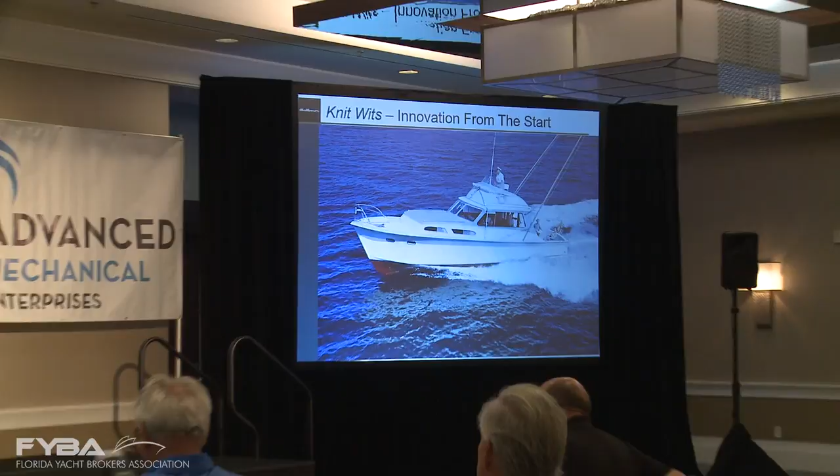Back in 1984, Dave Parker, our president, decided to go after and try to find it for our 25th anniversary. And of course, back then in 1959, 1960, there was no such thing as HIN numbers. So the question came up, how in the world are we going to find it? And so we had a young guy in our organization, some of you probably knew, Curly Cook.

Curly was a 16-year-old kid that Willis Slane hired off of the streets of High Point, North Carolina to work in the plant. And Curly screwed up one day by boring too large of a hole in one of the stud walls. And so Willis Slane got onto him and made him put a patch repair on it. Well, Curly told Dave Parker at the time, if I can get to the boat and it hasn't been modified, I'll be able to tell if it's the real thing.

So, of course, when people found out worldwide that Hatteras was looking for hull 1 and no HIN, everybody had hull 1. Everybody said, I've got it. So Curly would go to these boats. Some of them had been modified, so that was a little dangerous because, you know, you didn't know if it was the boat. He found the boat down in Panama.

A guy by the name of Ted Albrighton owned it, and Curly asked him, can I take that panel down on the starboard side? And the guy said, sure, but why do you want to take the thing down? He took the panel off, and of course, that scab that he put on in 1959 was there. So he called Dave Parker up, and the rest is history. Brought it back to the factory, and she's been refurbished 3 times. So from an innovation standpoint in hull, that's where it all started for Hatteras Yachts.

Now, of course, we've been known, some of you out there know a little bit about Hatteras' past and some of the propulsive technologies that we've utilized over the years. This is an example of some of that technology. Listening to Rich and George and all these guys this morning, I was getting a nervous twitch every once in a while because I've experienced all of that bad stuff that they talked about.

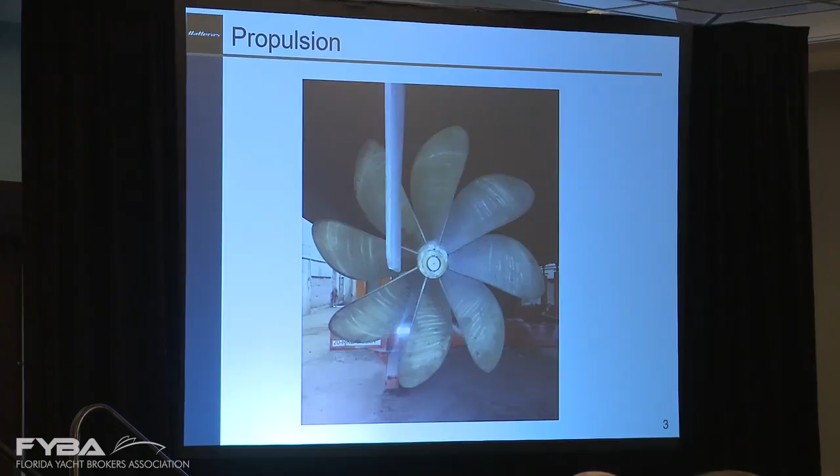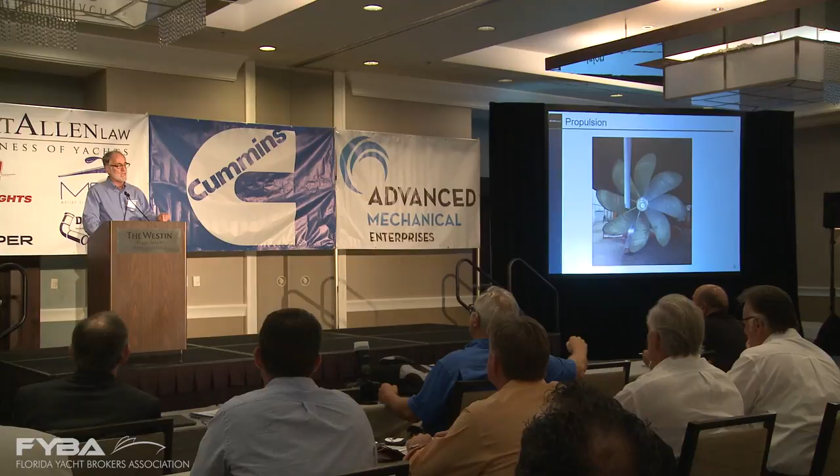But the vibration was a big issue for us because we had an established vibration standard back in the early 70s, but the maximum horsepower was probably 450 horsepower at the time. We still have that same standard today, but those horsepowers are up around 2,600 horsepower. So in order to keep that vibration that Rich talked about at bay, we've had to go to multiple bladed propellers, hybrid propellers, highly skewed blades, you name it. We've had to throw everything in the technological book at these boats to try to minimize and mitigate the vibration and noise issues.

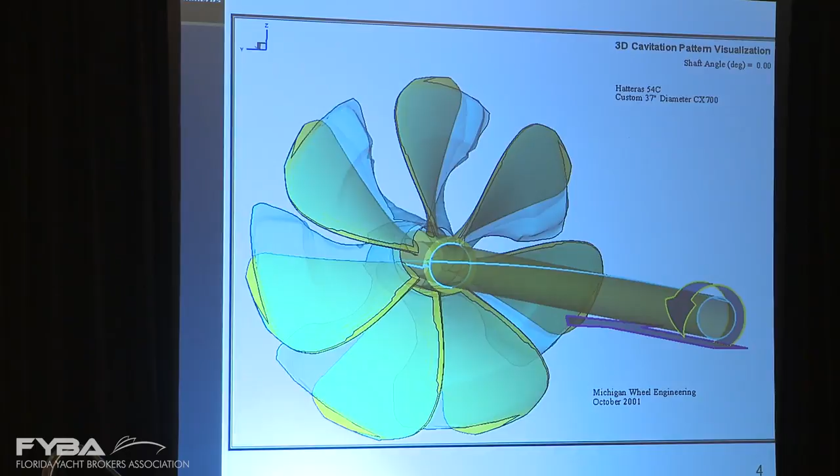This is some of the work that we typically do in getting a propeller developed, whether it's with Rolla, whether it's with Michigan Wheel, or even VEEM's. We let them go through a comprehensive cavitation analysis to try to minimize the cavitation. By minimizing the cavitation, you're able to remove the noise, and also you're able to improve the performance.

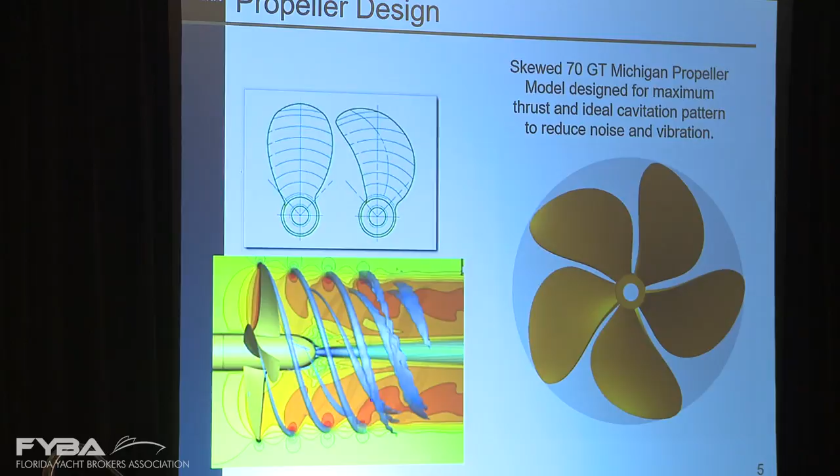Here again is an analysis we've gone through in trying to take a propeller blade and add skew to it, as you can see right here. This actually helps with the vibration that we experience on the boats.

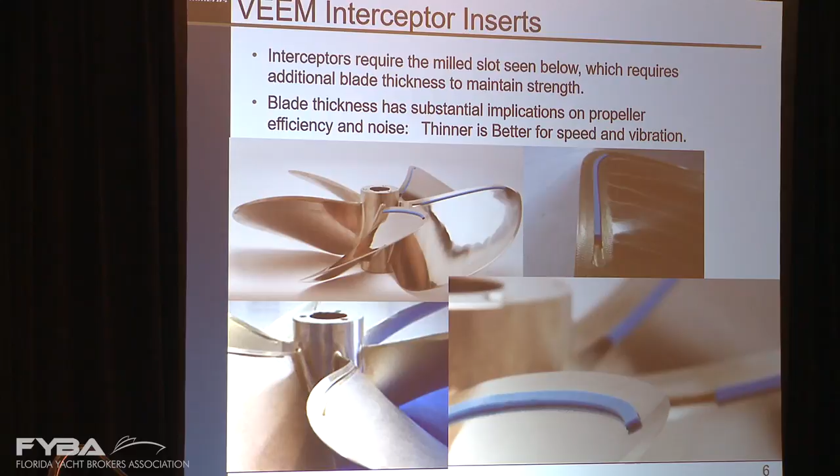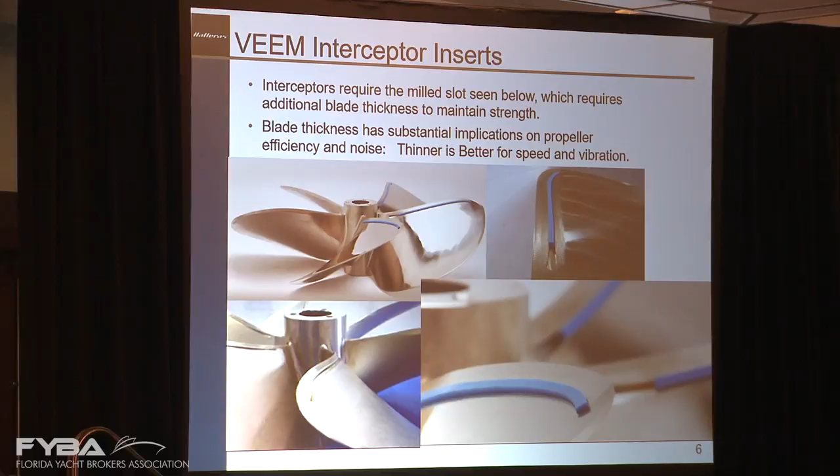How many of you have heard of VEEM propellers and the little plastic strips? What do those little plastic strips do? Well, we use the VEEM propellers from time to time, but what we found is that they're very creative in the method they use to try to balance the loads between engines. Most engine manufacturers are plus or minus 3%, but with all the digital information we give customers today, they will hit us pretty hard wanting to know why one engine's 10 RPM more than the other. This little strip allows us to balance that.

So either we utilize the VEEM propeller with a customer preference and they're able to balance the load with the engine, or with other types of propeller, the conventional Michigan or Rolla, we'll actually bend the tips, very much like you modify the ailerons by controlling an airplane. We don't get down into the root to bend these, we simply bend the tip. That way you're not breaking the grain structure of that propeller by doing that.

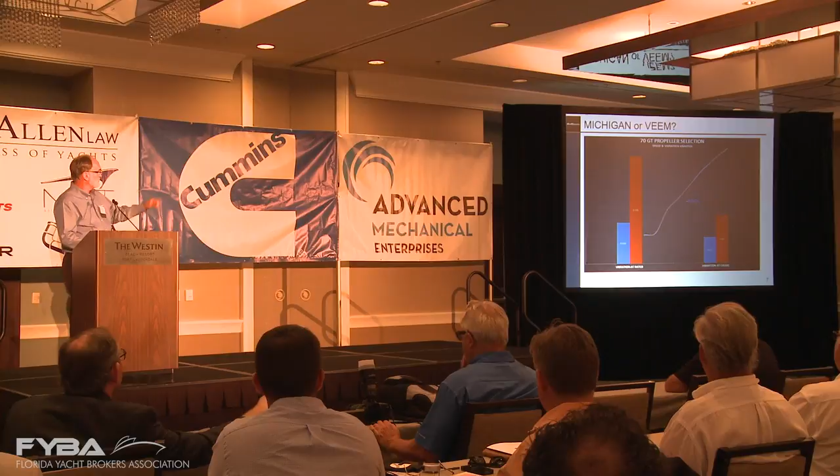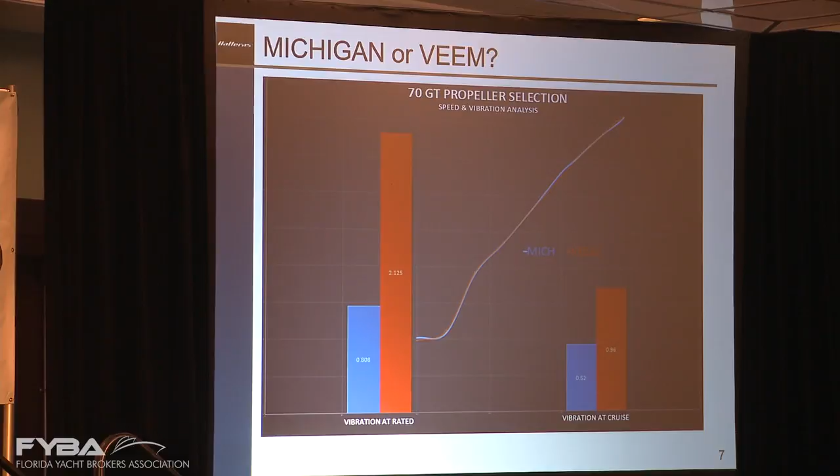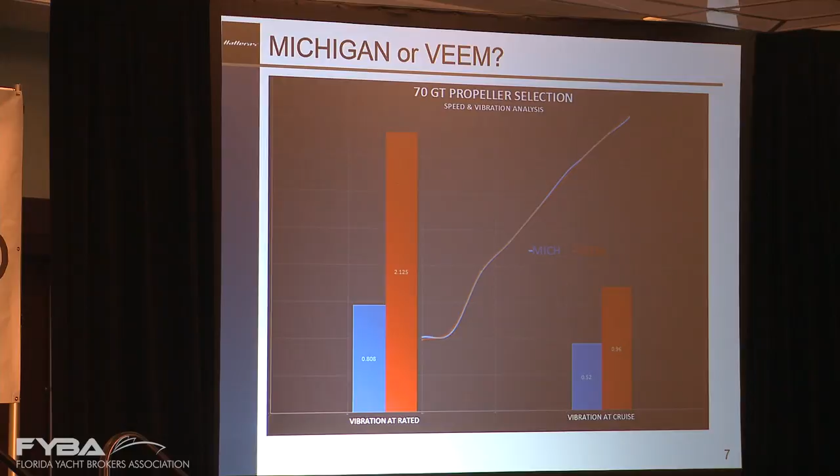This gives you a little idea of the difference between a conventional propeller and a VEEM propeller. And this is not pushing one product over the other. It's just that in order to give you that flexibility with a VEEM propeller and using those little plastic strips, the blade has to be much thicker to accommodate that. The key to performance with a propeller is making it as thin as possible. Technically, we can't make it thin enough, but you can see the difference between the two products in terms of performance, speed, and vibration.

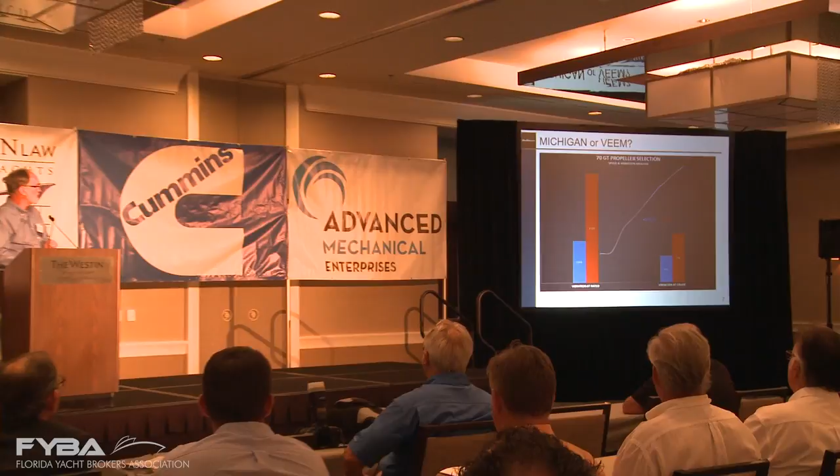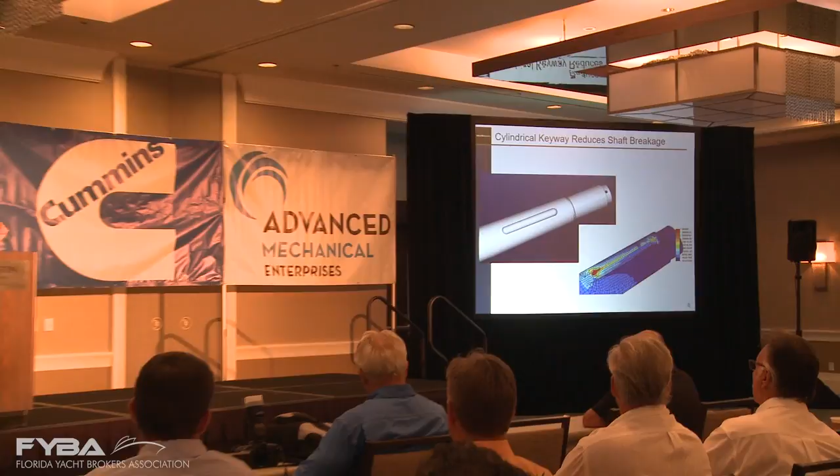Another problem we have, Rich mentioned the vibration problem he had where he had to change the shaft diameter, shaft length, or shaft material. Over the years, we've found that shaft breakage has been a major problem for us. Typically, you would think having a 5-to-1 safety factor on a shaft, or 10-to-1 as the Cummins guys mentioned this morning, would be adequate.

But the problem with that is when you're calculating what that safety factor is, I need to back this up a minute. When calculating the shaft diameter for these boats, we're only calculating the diameter. It doesn't take into account the keyway and all those stresses.

And because of the material we have to use in our industry, this is what they call an austenitic stainless. It means you can't heat treat it to get the toughness you need. You have to cold work it, like in a forging process. So what that does is it puts a very hard shell on the outside, and as you get towards the core, it makes it softer. It's where the shaft gets its strength and its toughness. The problem with that is these stress risers, where we're cutting the keyway here, well, it's going to do it anyway.

We've gone to what's called a cylindrical key. What you see down here below is a finite element analysis we've done. If you looked at that same analysis with a conventional square cut key, that entire sled runner would be very red, which would indicate very high stresses. By going to this cylindrical key, which we not only cut into the shafts but broach the propellers also, we've been able to reduce most of the shaft breakages over a long period of time by as much as 98%. That doesn't mean we don't have some show up from time to time, but this has been a major stress relief for the shafts on the boats.

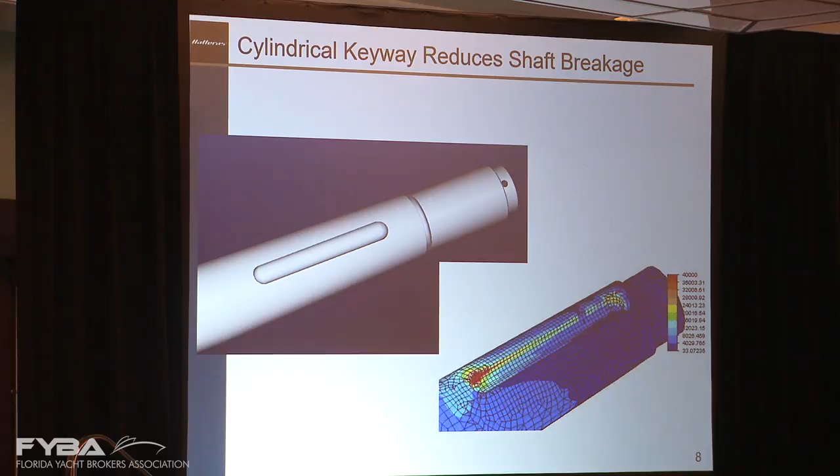Here's another shot of the finite element analysis we conduct on our shafting. One of the shots that someone showed earlier today showed a bearing, and I recognize this bearing from that shot.

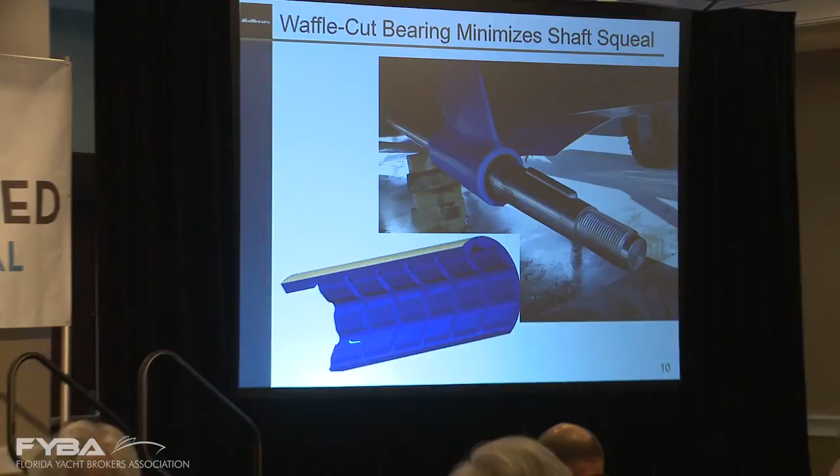How many of you have experienced what they call shaft squeal or propeller sing? It's hard to get rid of sometimes. A lot of times it is the propeller sing, and you can chisel the edges of the blade to take care of that, but in most cases it's going to be the cutless bearing. And if you'll notice in this area right here, it has the typical slots that run parallel with the shaft line, but it has these other cuts.

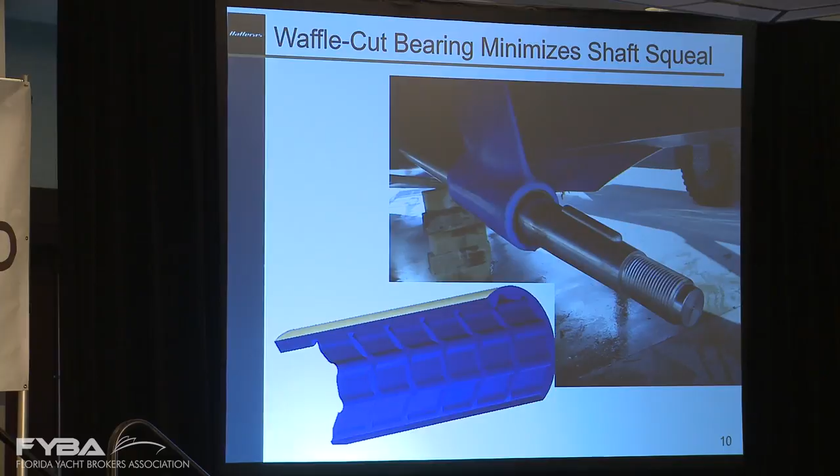We call this a waffle cut bearing. All of the cutless bearings that we install have this waffle cut pattern because when these bearings are positioned in the strut, they're positioned in a random manner.

They throw them in and put the two locking screws in. If the combined weight of the shaft and propeller is sufficient and it lands on one of those flats, it squeezes all the lubricating water out of the way and you get that high frequency squeal. If you could dial that bearing to where one of those longitudinal slots were, it would wet that specific spot and take care of the squeal.

By cutting this waffle pattern in there, we're able to provide water to the shaft regardless of its position, 360 degrees radially. So keep that in mind if you get one of those problem boats with a bearing squeal - you can install these and it'll take care of it.

How many of you have ever heard of a PropSmith? PropSmith, we developed at Hatteras probably about 20 years ago. The main problem was we could not force the propeller onto the propeller shaft tight enough.

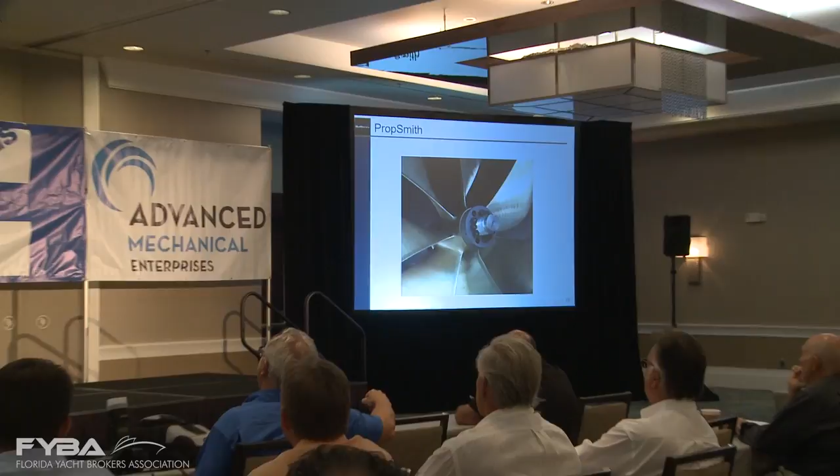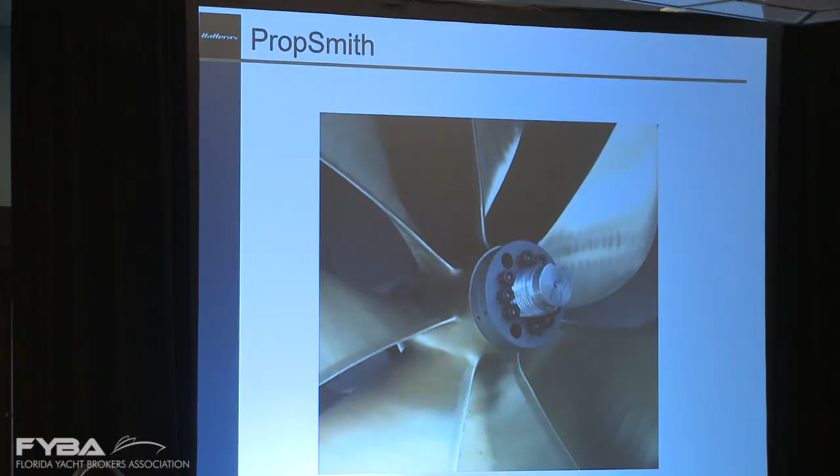We're machining a shaft from one supplier, and buying a propeller that's typically already late on delivery, so they're actually boring that propeller while it's still warm from coming out of the sand casting. So you get a lot of distortion. You've probably been in yards before where they've blued the shaft, put the propeller on it, and you notice you get about 25% surface contact.

Because the shaft is not locked into a clutch like you would in a manual transmission in an automobile, you can easily turn this unless you have the engine cranked - and of course you can't do that.

We developed this in order to be able to do just that. These PropSmiths have the capability of pressing that propeller on with about 100,000 pounds of force. What that does is actually stretch the hub of the propeller and allow it to fit onto the shaft, and it minimizes any shaft breakages later on.

It can also be flipped over 180 degrees and used to pull the propeller off. I think most of the dive shops here in South Florida all have these kits, and we also install these on all of the boats. This has helped minimize the amount of shaft breakages we've experienced over the years.

Now I'm back to cavitation again. What's the difference between cavitation and ventilation? Well, one's not a dental condition. What's the other? Prop slip? Okay, that can come from...

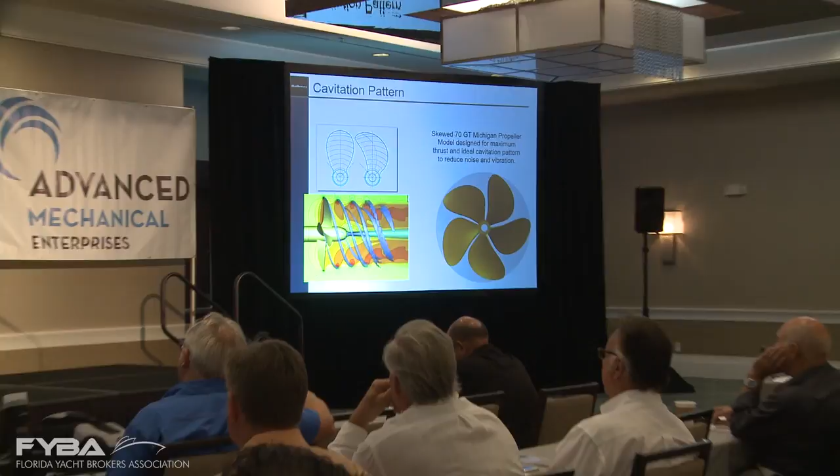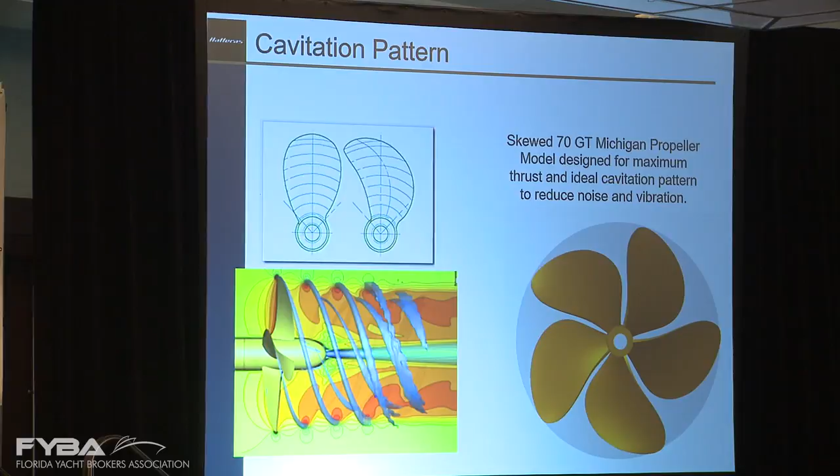Cavitation is when you subject the water to such suction that the water will boil. When it starts to boil, when that bubble collapses, it collapses with such force - and this is only about 3 milliseconds of time that the cavitation bubble forms and collapses. We all know what the result is: if it collapses on the propeller blade, it starts eroding material.

You might think, how can a bubble erode that kind of material? Well, that bubble, when it collapses, there's about 1,000 PSI of force in it when those walls of water come crashing in. If that bubble happens to be on any hard surface, it'll start eroding the material away microscopically, and you get the cavitation burn that we all know of.

The cavitation that we typically experience - we try to design the propeller so that cavitation bubble implodes off of the blade and not on the blade.

You've all backed down on a fish, possibly, or even with a motor yacht, and heard that rough, gravelly, cracking, popping sound. Well, that's cavitation, because that propeller is designed to go forward and maximize performance. They're not really designed to purposely back down, but it's a function they have to accommodate. So that popping and cracking noise you hear is from the cavitation.

It's all of those bubbles basically imploding, and you get these little 1,000 PSI pulses.

And because water's about 800 times more dense than air, that shock wave makes it right into the hull bottom, and that's where you get a lot of the noise and vibration, which takes me to the next slide.

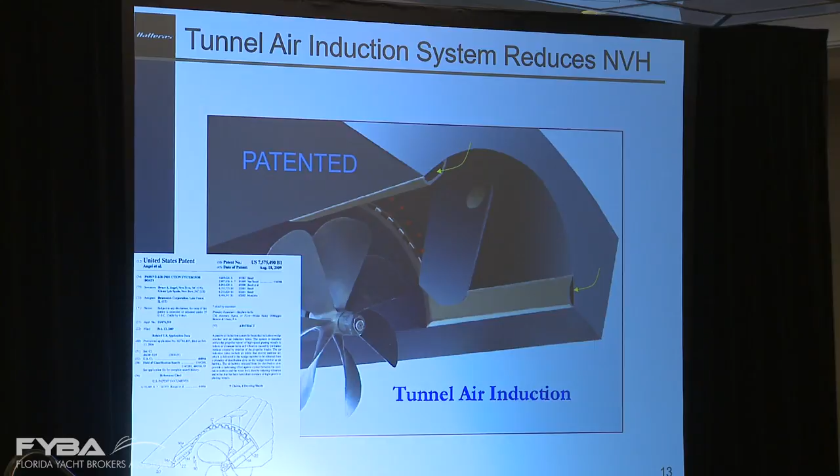Now, the Navy, because they've got an infinite supply of cash, especially getting a pay raise on the 15th of this month, they can put all sorts of technologies into it. On the nuclear subfleets, they actually have small holes bored in the tip of the propeller blades, and they pump air out of those holes in order to fill that cavitation bubble that's wanting to collapse. As soon as you take the suction pressure off, they fill it with air, so it allows them to run silent. We took that concept and developed a patented system we call air induction.

Now, some of you old-timers have been around for a long time. You've probably seen something of this on 65 Hatterases back in the late 80s and early 90s. What this does, that cavitation popping and cracking that you hear, we actually put a sheet of air.

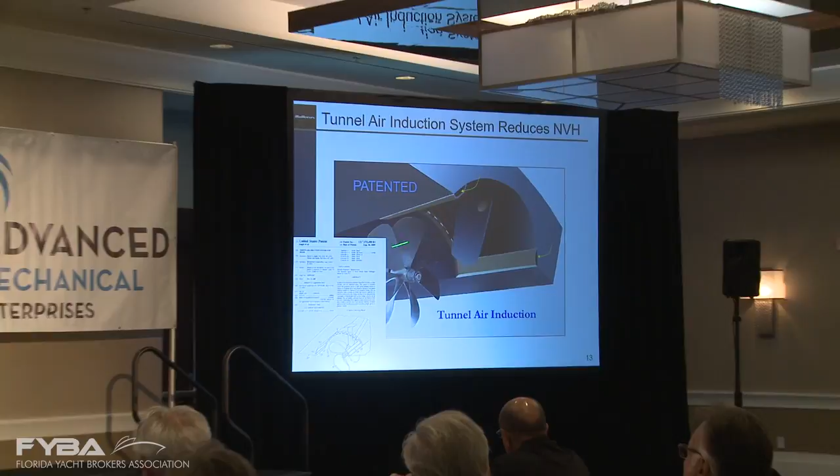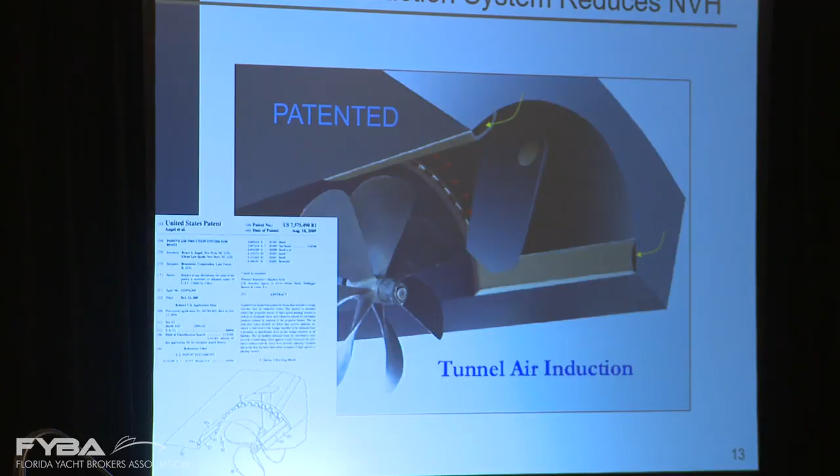So as the boat gets up on plane and the water's coming down the tunnel, it hits a wedge here, which puts a negative pressure in behind it. As the boat gets on plane and these pipes open up to atmospheric, air is sucked in, and it's evenly distributed inside of that tunnel. By doing that, we're able to put a sheet of air between the propeller tip, that cavitation, that 1,000 PSI little bomb going off. We're able to insulate that, and that shock wave can't make its way into the bottom of the boat. So we're able to reduce not only the vibration, but the noise that comes into the boat with this patented device.

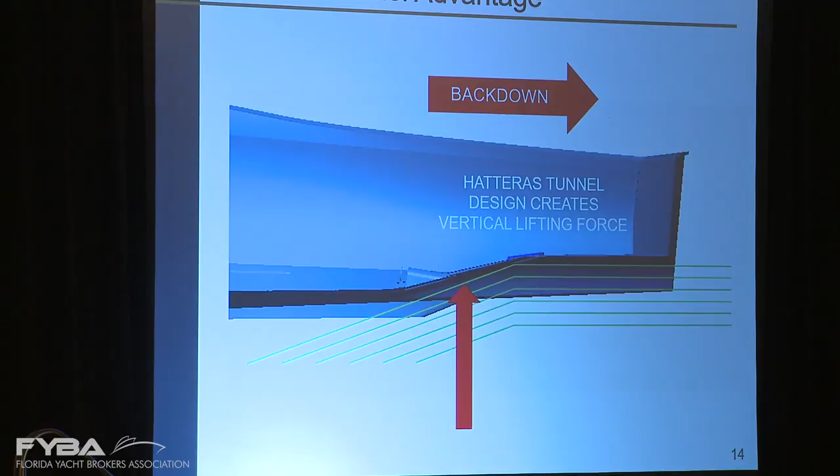Something else we've done, and we've done a lot of testing at Stevens Institute up in Hoboken, New Jersey, Davidson Labs. We've done quite a bit of testing with tunnels and propellers and hull forms and such.

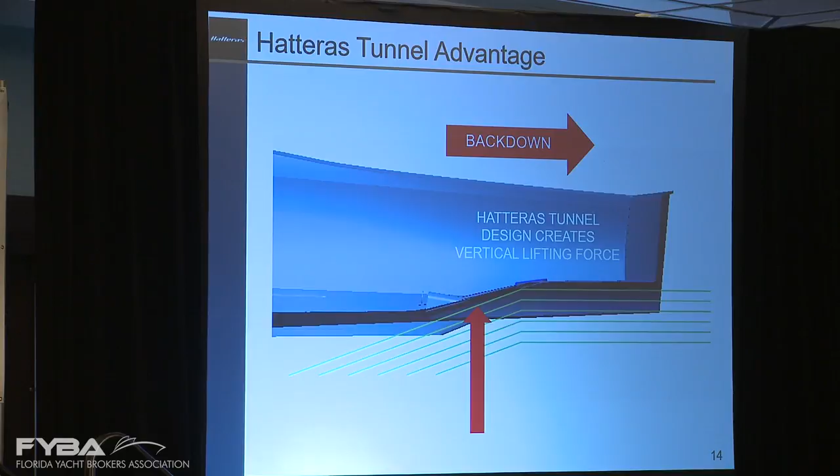This particular piece of information is a tunnel that we've designed. Typically, this inflow that you want to go into a tunnel, you want it to be as subtle and smooth as possible. We sacrifice a small amount of speed, maybe 3 to 4 tenths of a knot, by actually designing a ramp right here.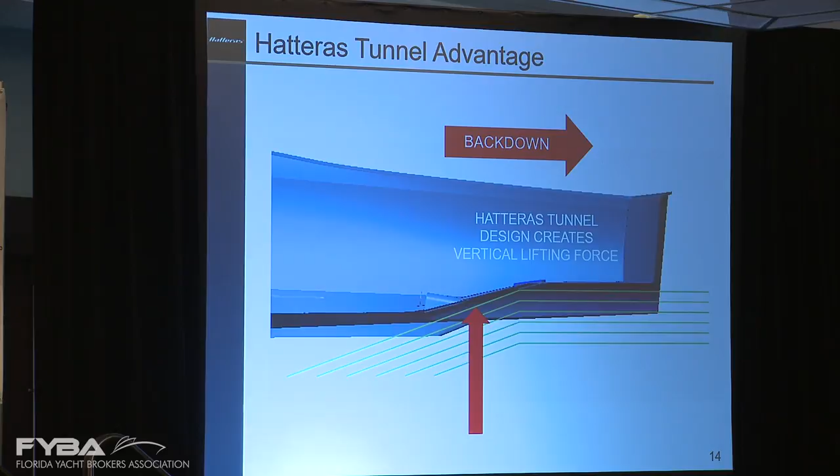Now we're going to get into hull form a little bit. What are the advantages of a concave hull? Anybody tell me? This shape here.

Less pounding? Anybody else? Well,

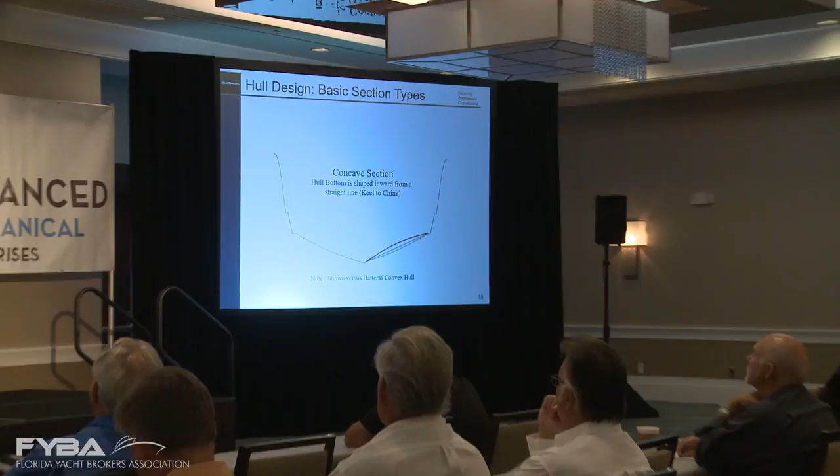That particular shape right there is what you would have found on Knit Wits. It was designed by Jack Hargrave back in '59, heavily influenced by John Rybovich also. And that hull form right there provides you one of the best sea-keeping boat hull forms out there. As long as you're going head to sea, it'll slice right through it and peel it off. The minute you have to go crossing sea, this will pound your brains out.

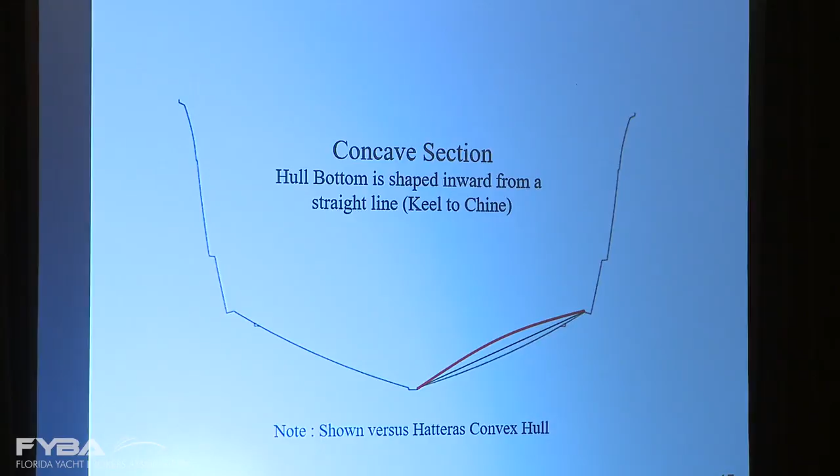An example would be standing in a swimming pool and taking your hand like this and slamming it in the water. We all know what it's going to feel like. It's going to feel like 1,000 needles sticking in your hand.

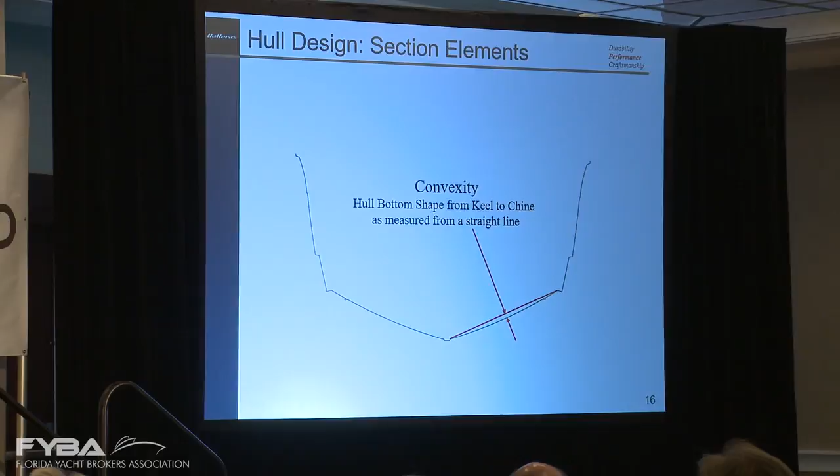This is convexity that we utilize on most of our hulls. Most of our competition's doing the same thing now, which is one of the biggest compliments we could get. This is a bell section. So the difference between the concave and the convex is simply, you can also stand in that pool of water and take your hand and do it in this direction and slam it down, and it doesn't sting nearly as much.

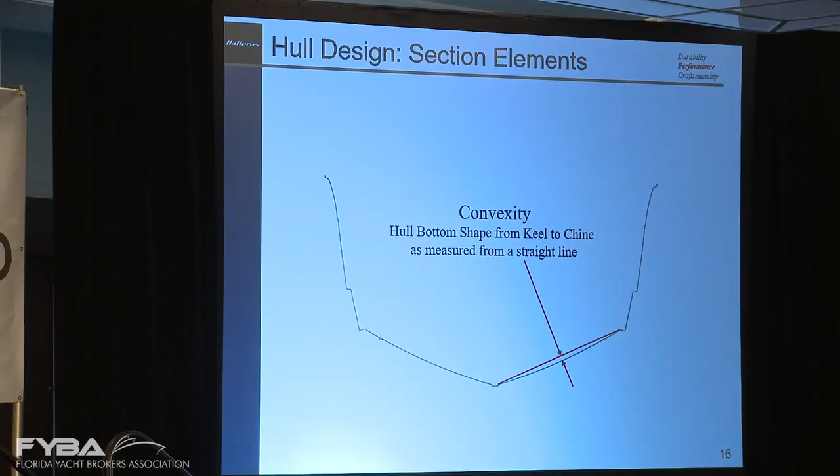The reason for that is the convex hull is like taking a basketball and slamming it in the water. Over time, as it starts penetrating, a different area is being exposed with that movement, whereas the concave hull impacts all at once. So you have to put additional structure in the boat to handle that.

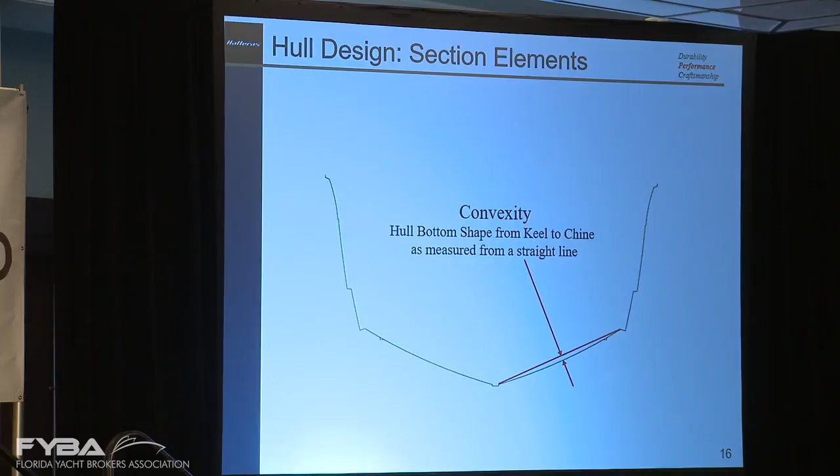Another benefit of the convexity is you're able to put larger accommodations in internally, and you're able to hold more fuel. Now, there's always compromises. A concave hull is typically one of the driest boats out there. So in order to utilize the convexity, we have to put spray rails on it to try to mitigate the wetness. That's one of the compromises we deal with from time to time.

This is some computational fluid dynamics work that we do on a lot of the models. You see here is our GT60. We start at 14 knots.

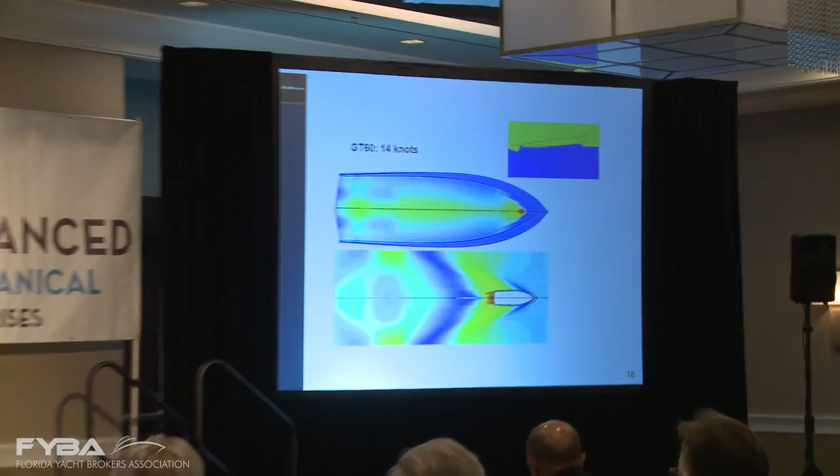Now the colors here, the important colors to look at are going to be the red and the blue. At 14 knots, not much is going on. As we start getting faster, you start seeing a little bit of red begin to form up in the bow area.

You also see right here you're starting to see the negative pressure due to the propeller sucking water into that. We start getting up to 30 knots. The red is indicating high pressure. So let's just say on a 40-knot boat, at the stagnation line, which is this right here, which is really what provides all of the stability to a planing vessel.

What do you think the pressure is, let's say at 30 knots, on a boat running there at that stagnation line or that chevron stripe? Anybody want to make a stab at it? Okay, I heard significant. Anybody want to give me an insignificant? How much? What would you say if I told you it's only 17 PSI? That's about all we're looking at there.

We go to 34 knots. You still see that building. The boat, typically, if we had a speed trim curve here, we'd see it starting to flatten out. Therefore the pressures would be diminishing somewhat. You can see the discharge of the propeller here, very high pressure.

Go to 38 knots, starting to flatten out quite a bit. We hit 40 knots, 42 knots. Now, how much pressure do you think we're seeing at the stagnation line at 42 knots? It's not linear. We're looking at only about 32 PSI.

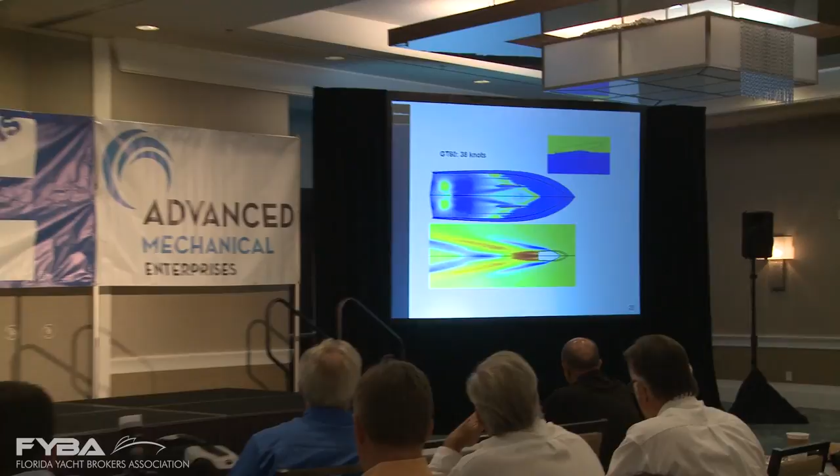The reason for this particular analysis, let me back up here a minute, was because we had a negative pressure that existed right in this area here.

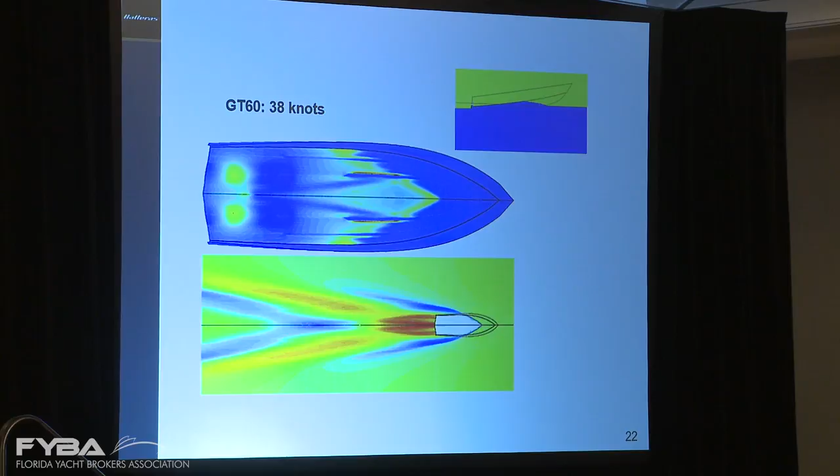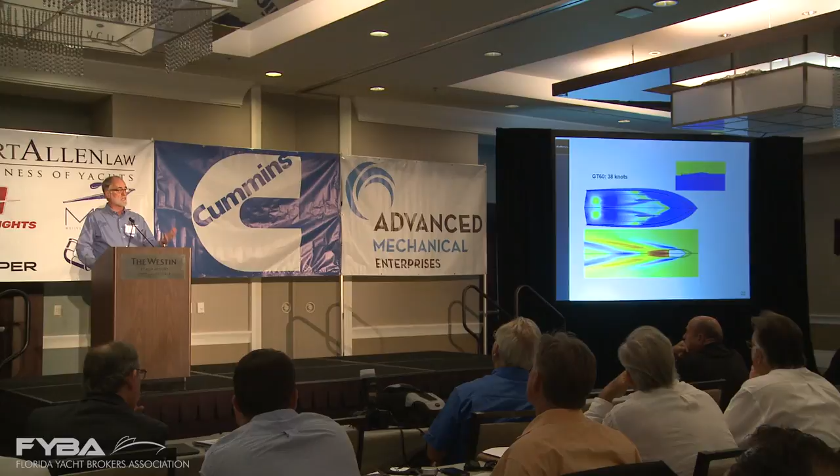And what happened is, how many of you have taken a spoon and held it up against the flow of water coming out of the faucet in your kitchen? How it'll pull the spoon into it? Well, the bottom of these boats, as we put a convex hull shape in it, that shape in order to get a ride quality... but one of the downsides, you have to be careful with that, as you submerge that rounded shape into the water, it becomes an inverted airplane wing.

And we all know what the purpose of an airplane wing is. It's simply to lift the boat. Turn that over, put a fluid that's 800 times more dense than the air, and it literally will suck the boat over to one side. And if you're lucky, it'll oscillate back and forth. If you're not, it lies over to one side, and that's where you get the so-called keel walk.

So it all happens right up here in this area. And one of the simple fixes for this, if you know exactly where the low pressure is, you can put a through hull there and vent it to the hull side. The problem will go away.

I didn't read that in a book. That's 13 stitches on my left thigh.

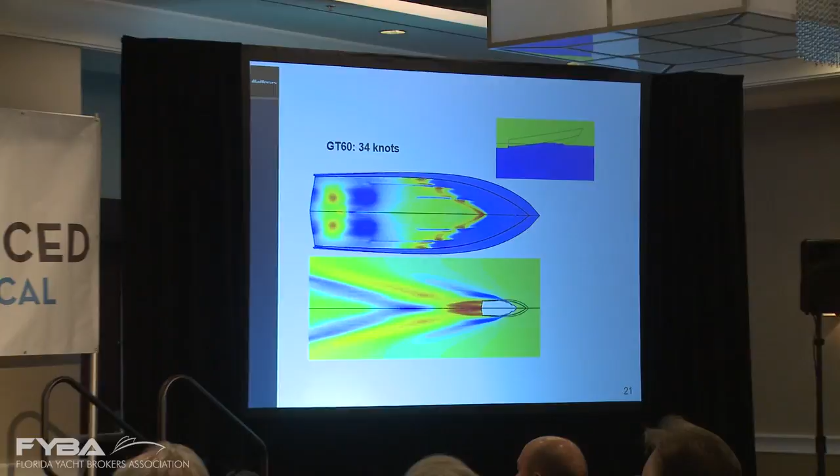And or you can put a strip of wood or fiberglass there to simply let that flow that's going down the stagnation line hit that. And what it does, it raises the pressure from a negative 2 PSI to approximately 30 PSI. And when you do that, the boat will lock up and be solid as a brick.

So when you're trying to sell one of these older boats and somebody starts talking about keel walk, there is a fix. It's a simple fix, you just got to know where to put the stick. And when I say the stick, you're talking a 1x1 batten is all it takes.

It doesn't take much at all.

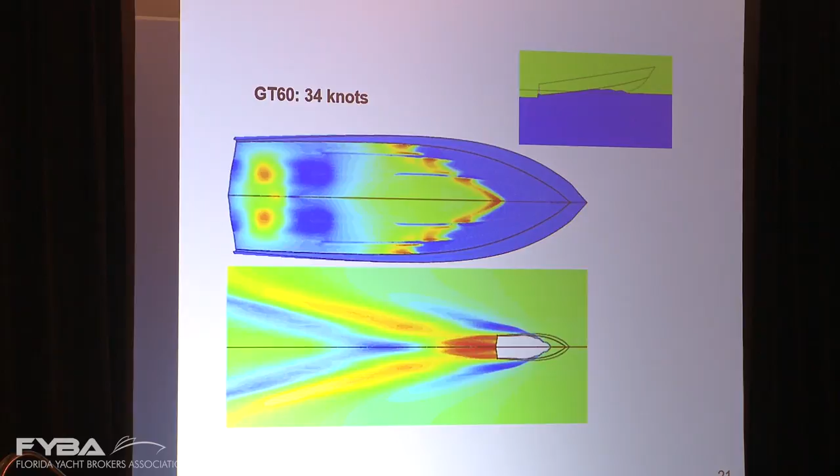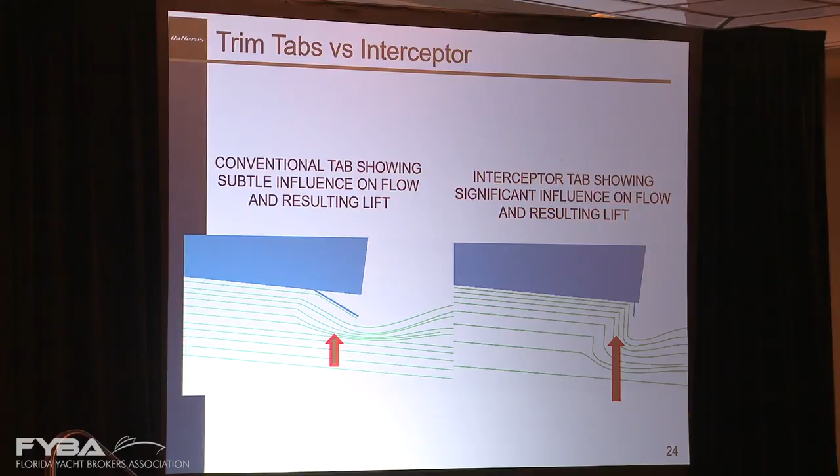Some more things that we're doing. How many of you heard of interceptors? Trim tabs. It's one of those things that have kind of become vogue here in the last 10 years or so.

It's so simple, and I'm so frustrated at all the physics classes I took that it didn't stumble onto me. You've always heard in physics class: high velocity, low pressure; low velocity, high pressure. When you've got that velocity coming down the hull bottom and it hits, it's just very nice laminar flow. But when you've got an interceptor and that flow coming down the hull bottom all of a sudden hits an abrupt stop, that velocity goes to zero and you get a pressure gradient that lifts the boat with very little work.

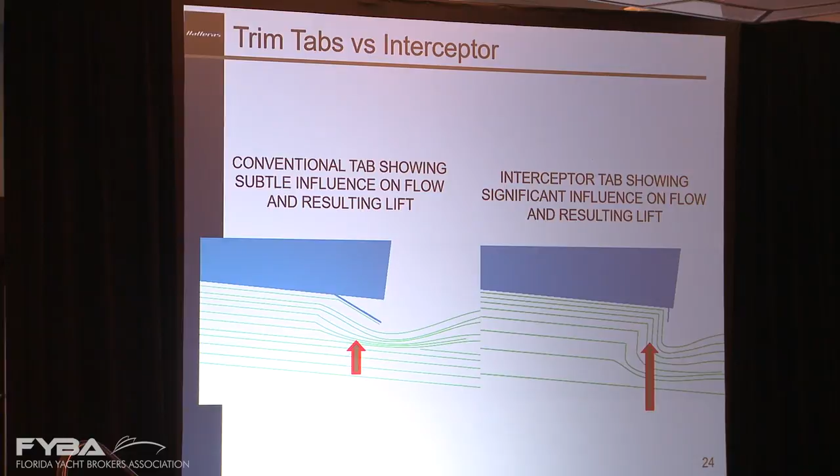So we're now trying to incorporate interceptors into all of our boats now just because of the effectiveness.

As you also know, these interceptors are fairly expensive. So we've tried to utilize a Bennett trim tab hydraulic system and designed our own system, and this is off of our 70 GT right now. It has the same effect. The only difference is where the interceptor is truly 90 degrees to the hull bottom, we're swinging a bit of an arc, so we'll probably be 85 to 95 degrees as we pivot off the hull bottom.

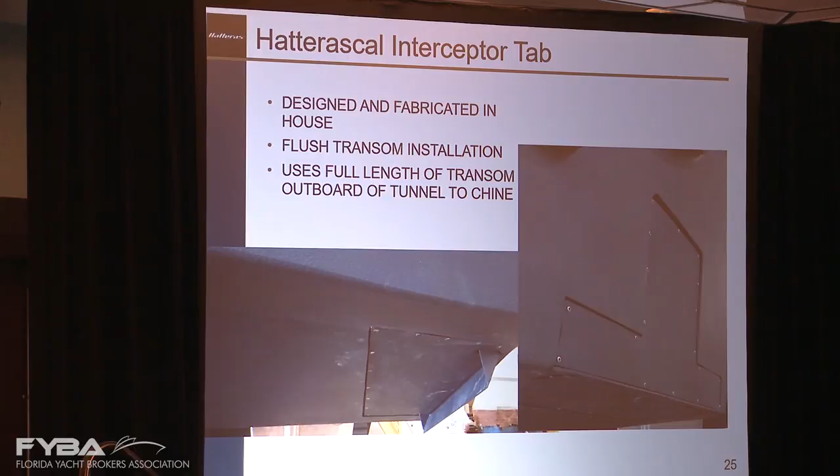Now, one of the interesting things we've been able to do with this, and I hope Brooke doesn't get upset with me here, I'm showing a fin, okay? Brooke, don't hold it against me, but some of our larger boats have fins.

We also use the Seakeepers also, and they've been very effective. But what we've been able to do over the last year, with a lot of testing, has been with the stabilizer fins that have been pretty common over the years. We've been able to change the angle of attack of those fins and raise the running angle of a boat.

This happens to be some test work we did on the 70 and the 100 motor yacht. What we do is raise the bow of the boat from about 5 degrees running angle along the buttocks to about 7 degrees. As soon as we do that, we see an increase in fuel burn, the boat slows down, and we see a loss of RPM.

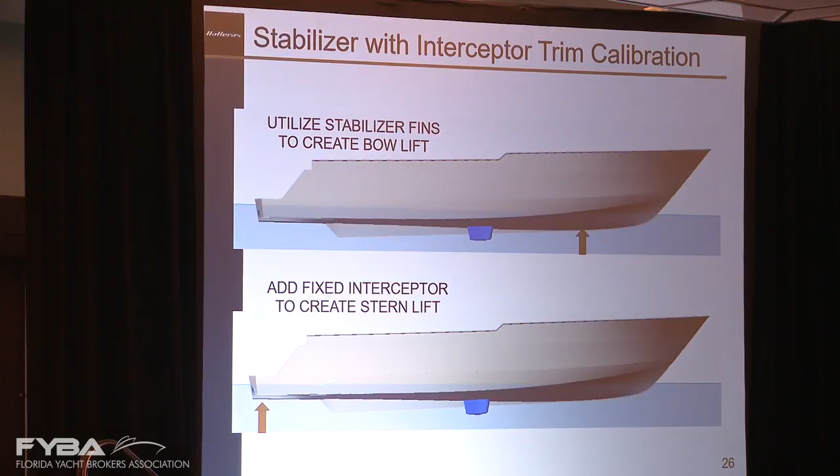All a bad thing. But because of the effectiveness of these interceptors, we're able to put an interceptor on this boat, and you can see here that we got a 6% increase in range. Now we're talking a 300-and-some-thousand pound 100 motor yacht here. We also saw an average 3.5% increase in speed.

All we're doing is lifting the bow and then turning right around and lifting the stern. So it's like the heave value, which is the level at which the boat is out of the water. It's like we're fooling the boat into thinking it's running in a much lighter displacement.

We've run tests on boats that are 30 to 40 knots, and we've also run tests on boats that are 20 to 23 knots. So this is a new technology that we're playing with now. We're trying to take this down the path of the fins being small enough that they don't extract any performance from the boat, but effective enough that we get this benefit.

So Brooke, you can still put a Seakeeper on the boat.

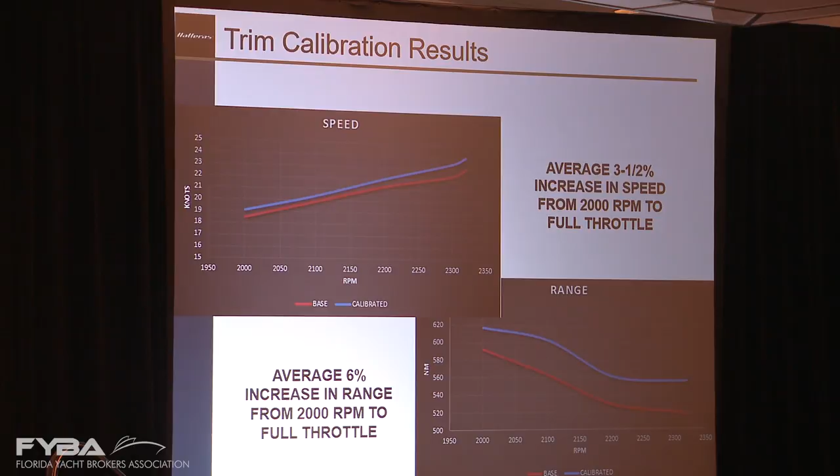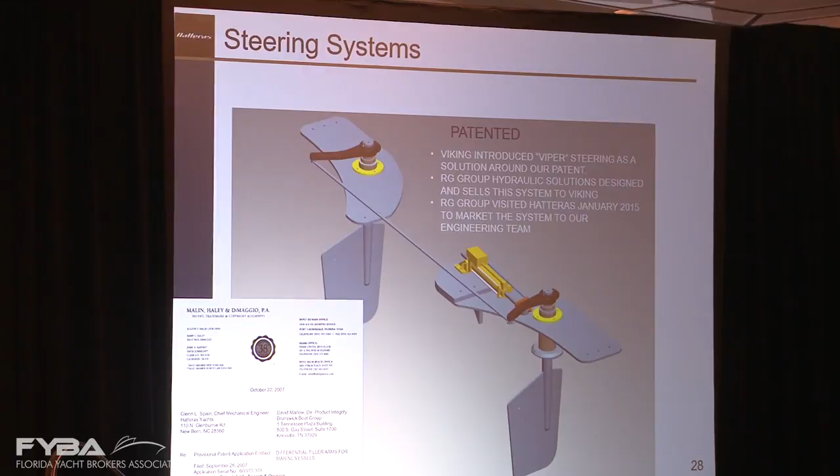Something else, a patented device we've got. How many of you understand how the differential in a car works? You put your car into a turn, the outboard tire has to turn at a greater speed than the inboard tire because that circumference is greater. That makes sense? Well, the same thing applies to boats.

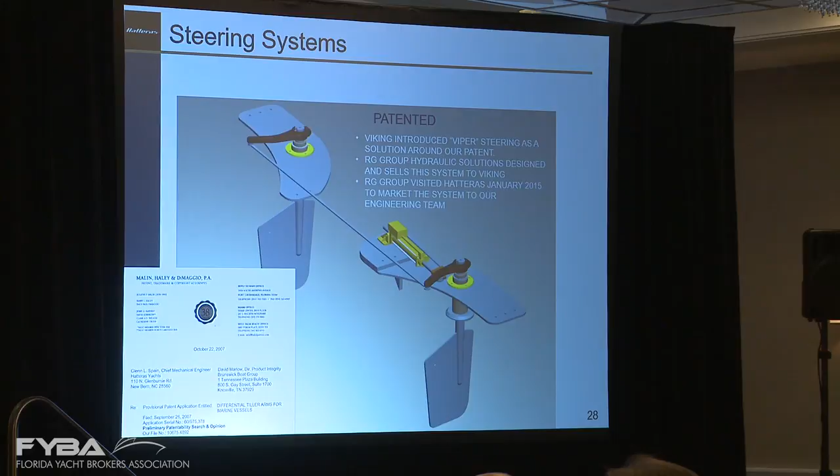When you throw a boat into a turn, the outboard rudder sees a higher velocity than the inboard rudder. We have a term at Hatteras when we test these boats: whenever you throw it into a turn and the angle of attack and velocity are great enough, the rudder will stall. And when it stalls, the boat does what we call a crazy Ivan. It diagonally stuffs the bow, and you've probably all experienced that from time to time. It's generally due to that outboard rudder blowing out.

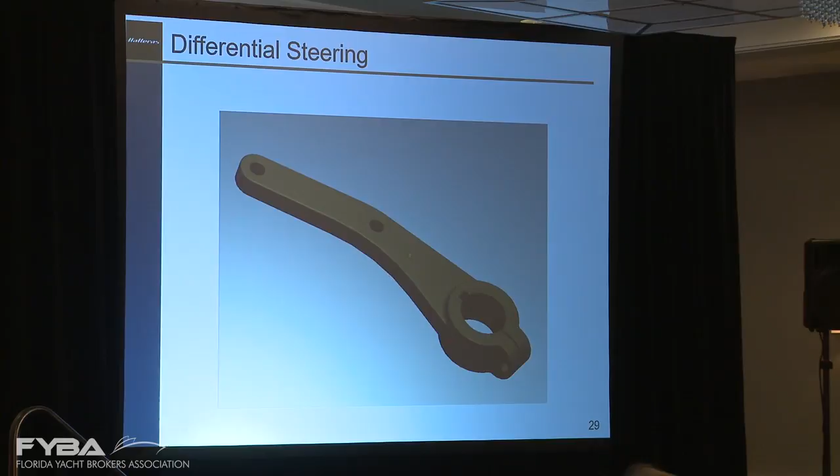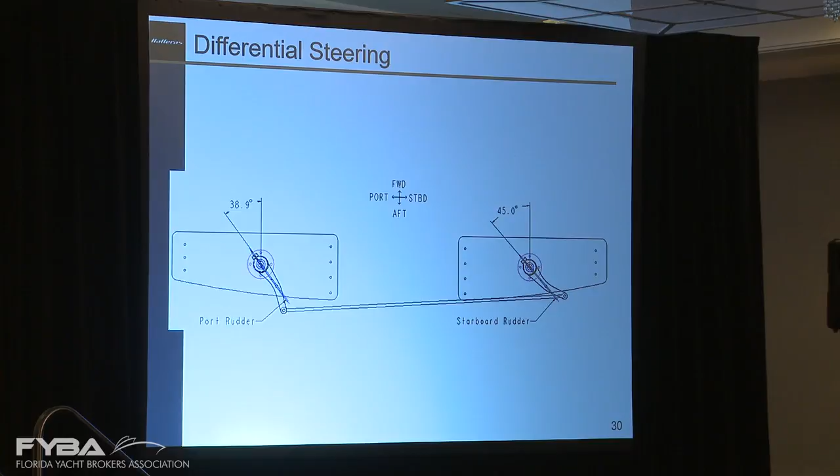One of the ways we've been able to mitigate that is we've developed this dog-leg tiller arm. So with the boat sitting at idle, we have the typical toe-in you'd expect to see. But as you see here, in a turn you see 38.9 degrees versus 45 degrees. So we're able to minimize the outboard rudder angle of attack, which makes the stall opportunity go away.

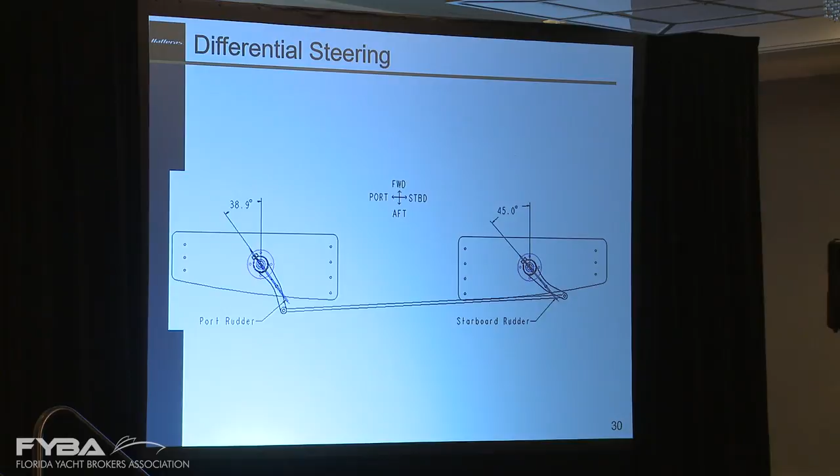We're able to maximize the angle of attack on the inboard rudder, because not only is the angle of attack different, but the velocity going across that rudder is slower, and it's actually submerged deeper since it's on the inboard of the turn. This way we're able to minimize the ventilation of the rudders, which typically results from putting deep tunnels in, which we do on most of our boats to try to minimize the draft.

This is another view. You can see the difference in angle with the dead ahead, and the greater angle of attack of this rudder versus the other.

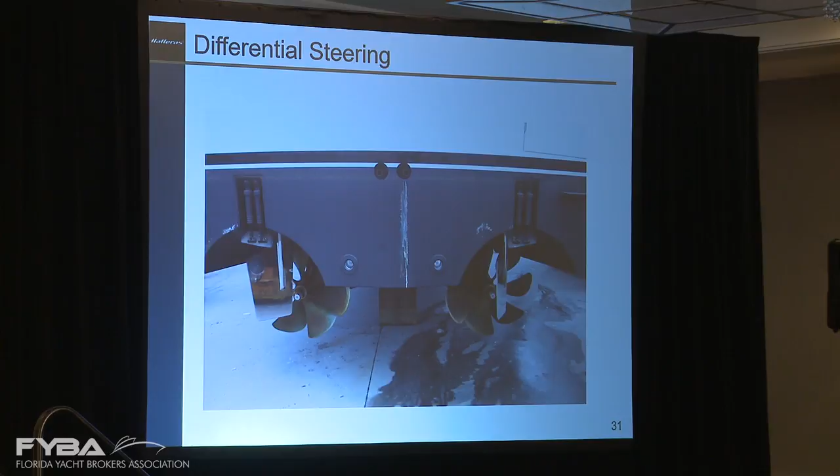We also build our stainless steel rudders. You might ask, why stainless instead of bronze? Bronze is a wonderful material from a standpoint of corrosion resistance, but it's only half as stiff as steel. So this allows us to use smaller shaft diameters, which provides less drag on the boat.

These shafts we use right here are Aqualoy, the same shaft material we use in the shafting. There's a keyway cut around the entire perimeter, and then a slot is cut into this 3/16 stainless plate. So the weld is simply there to hold those two items together. It's keyed, and we're able to minimize the stresses.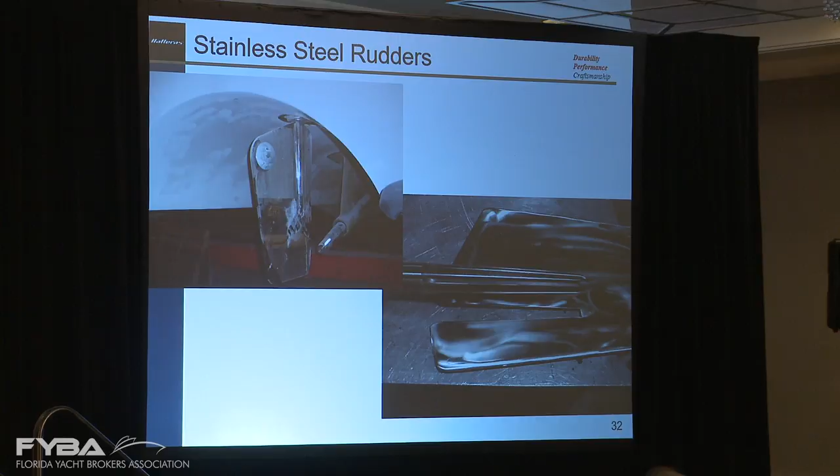Something else we do, from the standpoint of improving the seakeeping of the boat, is pull most of the combustion air on all of our GTs from underneath the gunnels. That way we're able to move the forward engine room bulkheads further aft, give the customer more accommodations, and with the tunnels and the ability to flatten the shaft lines out with bigger propellers, we can actually push the engines further aft also.

Structural design: we do finite element analysis on a lot of the structure, and a lot of tank testing with models. The computer models today are sophisticated enough that the predictions they provide are almost perfect.

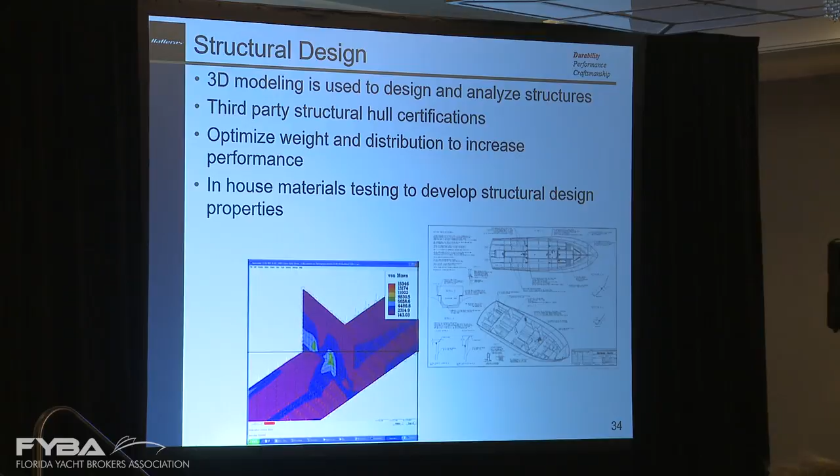I still go to Stevens every once in a while just thinking it's going to be the day that I'm able to lift that magic stone and have the new design, but it hasn't happened in 37 years. But this is some of the work that we do to try to optimize the weight distribution and the performance.

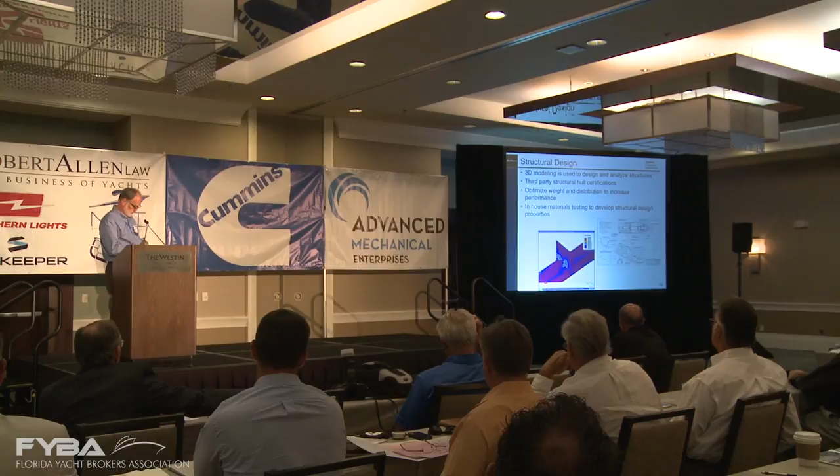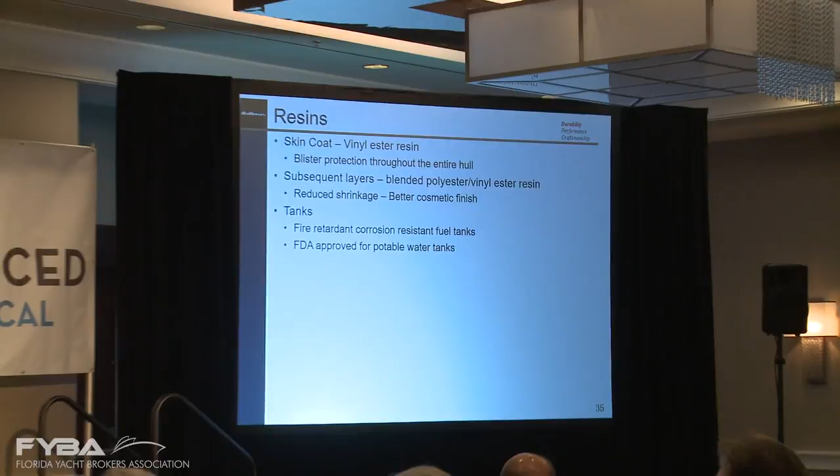Our resins - a skin coat on our boats. Although all of our hulls now are resin infused, we do put a pure vinyl ester skin coat on to help with blister guard protection. It also provides a barrier to the mold for better cosmetics once we infuse. It's very difficult to infuse a product today and get a gel coat finish out of that.

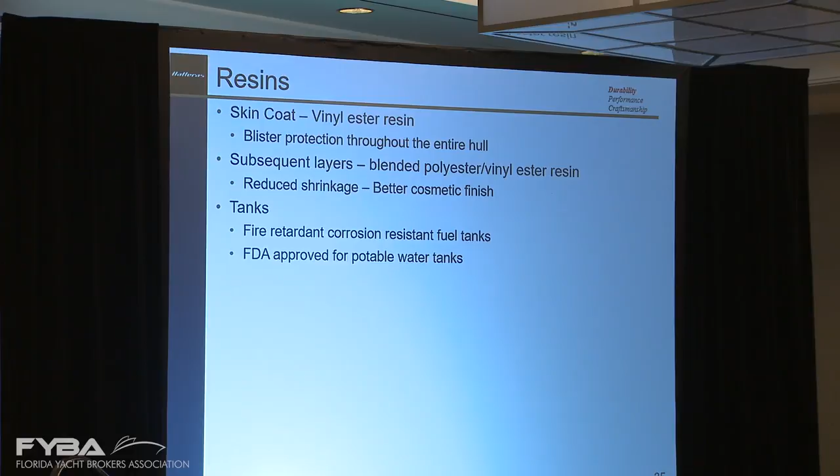And of course, all of the infused resin is a blended polyester and vinyl ester, which reduces shrinkage and provides us with better cosmetics. The tanks are still fire retardant resin, and of course FDA approved resins for the potable water systems.

We use quite a bit of core. I wish I could say we'd never used balsa core in our boats, but in 1984-85 we stopped using balsa. It was just such a challenge. It has wonderful physical properties, but the only downside is it rots, and you never know what's going to happen with the guy on the production line - is he going to put a screw someplace and decide he needs to pull it out and not caulk it? So water intrusion can be a major problem.

So we use all PVC foam cores, and because we are infusing the boats, all of that kerf cut gets filled with resin, so we don't have to worry about any water intrusion at all.

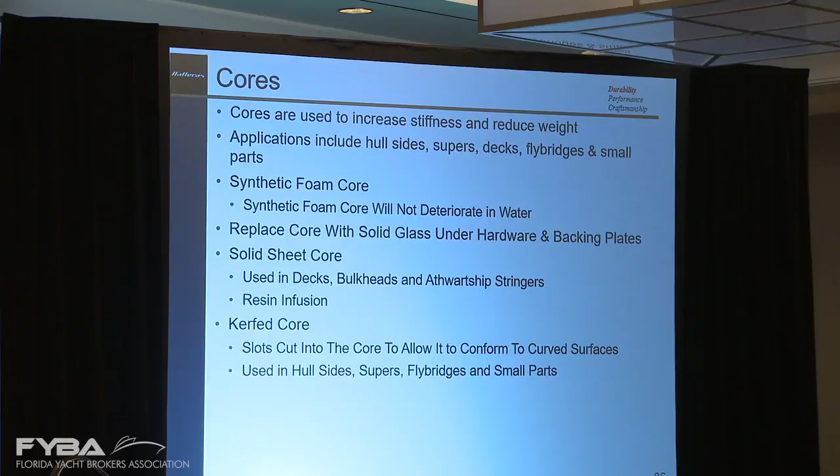Advantages are stiffness, reduced weight, and optimum glass to resin ratio. Typically in a hand lay, in any factory, you're very lucky if you can get a 50-50 glass to resin ratio. Most of ours at hand lay were 60% resin, 40% glass. Glass is where the strength comes from - the resin's simply a binder. By going to resin infusion, we're able to flip those ratios: the glass goes to 60% and the resin to 40%. So we're able to increase the stiffness and strength of all of our laminate just by going to the infusion process.

And of course, we're using a patented closed mold process that we didn't develop, but we're utilizing it, and we use vacuum pressure to distribute the resin. How many of you have ever seen an infusion process? Kind of interesting, isn't it?

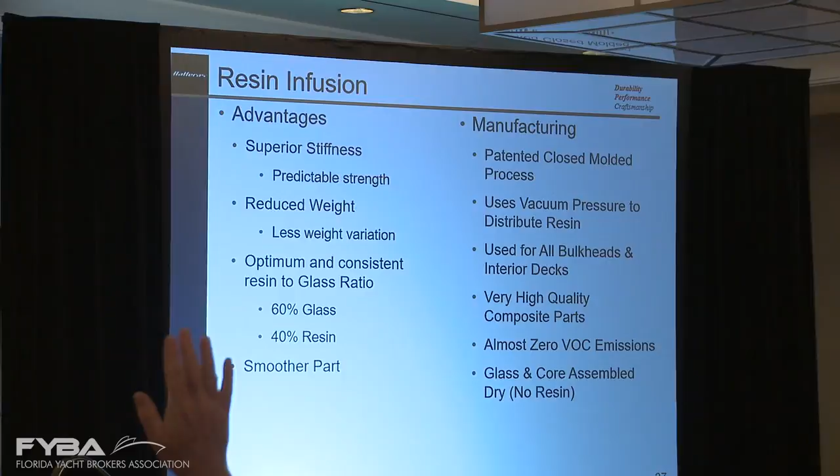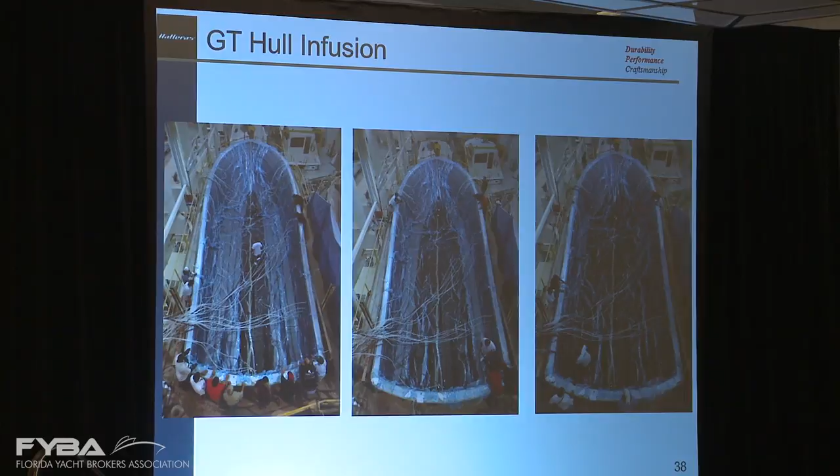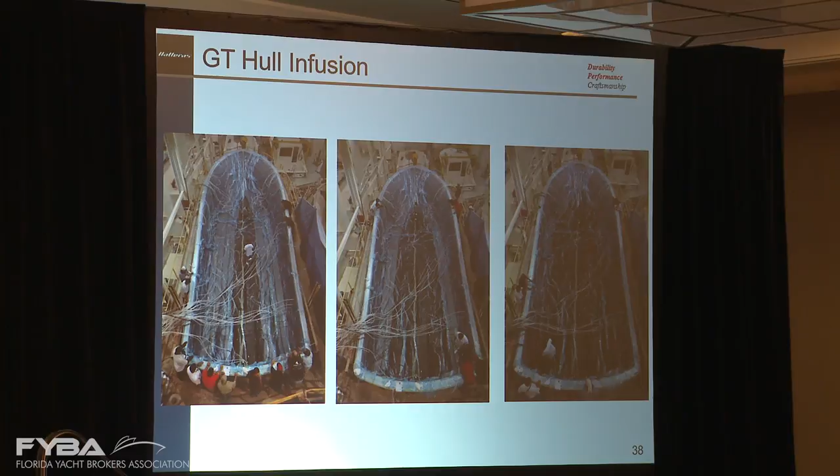Typically, there's no time saving at all in infusing the hulls. It takes the same amount of time to load all of the dry glass and all of the foam. We draw straws to see who's going to be the guy to launch this thing, because once you start it, you can't stop it. It takes anywhere from 2 to 5 hours to totally saturate, and once we start venting and getting resin at the sheer line, we shut the valves off and wait for it to cure.

Once again, we use foam cores on the hull sides. We run foam all the way down to the running chine because we're filling that kerf cut with resin. We're not concerned with the static displacement of the boats. So from the upper chine to the lower chine, the foam is exposed to water, but because all the kerf cuts are filled with resin, we don't have to worry about any water intrusion.

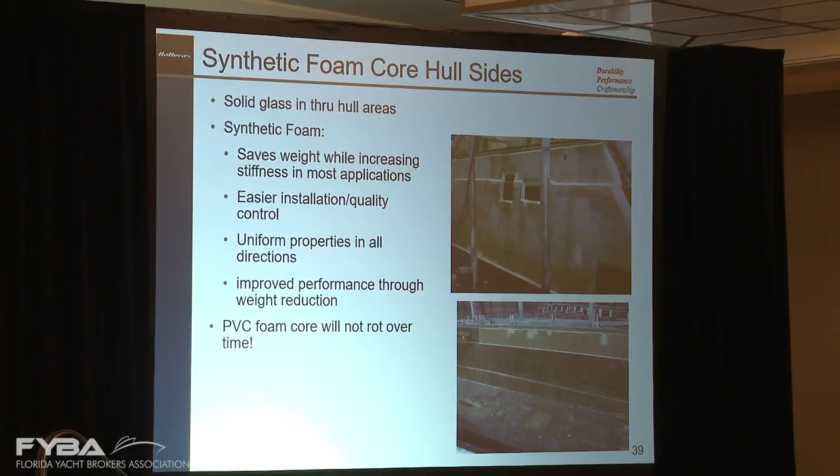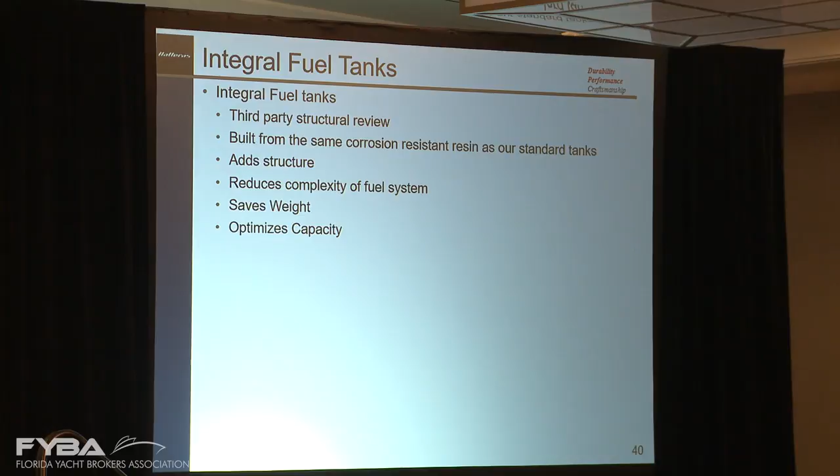Here's a shot of one of the integral tanks. We're able to reduce the laminate somewhat because the baffles we install in these tanks end up being a structural component. They're water jet cut on our water jet mill for an adequate fit to the hull bottom. Therefore, we're able to get the panel sizes smaller and improve the stiffness.

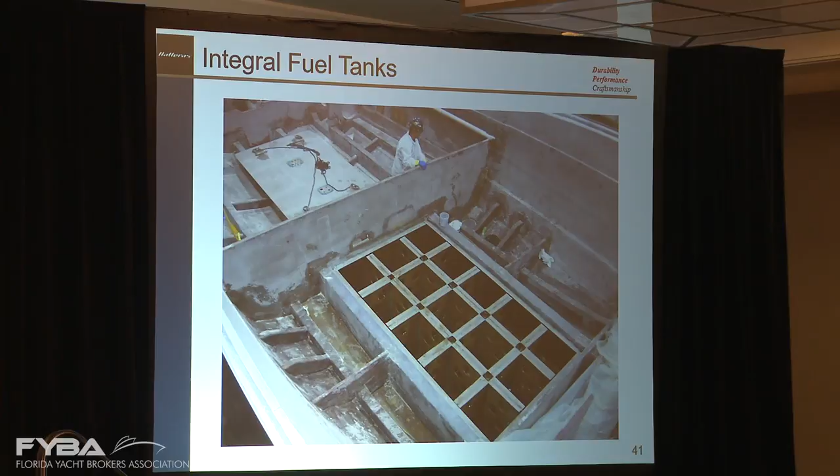On your vinyl ester resin versus the polyester, what is the difference in the two, or why would you use vinyl ester through the entire boat, for the elongation? Typically, the vinyl ester resins are more flexible. They're not as brittle, so they give us better elongation.

And one other thing, when you do the infusion and you have all the excess resin, I guess that creates a lot of weight. How do they remove that? Do they have vacuums, or do the guys get in there and scrape it? Well, no, because you're saturating and pulling a vacuum on a vacuum bag, you're able to reduce the resin from 60% on the hand lay-up to only 40%. But all those tubes you saw are full of resin. So for every shot we do, we average about $5,000 to $6,000 of expendables that just have to go to the landfill because of that extra resin.